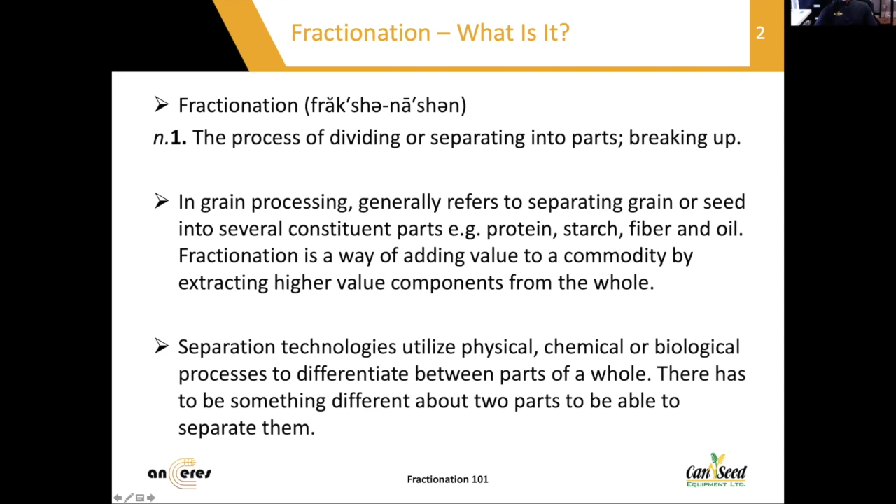And separation technologies utilize physical, chemical, or biological processes to differentiate between those parts. And so there has to be something different about two parts, obviously, in order to be able to separate them. So I wanted to start by talking just a little bit about what makes up seeds and how they're composed, so that we can understand then what's necessary to take them apart and get these components that we're interested in.

This slide just shows a number of different Western Canadian commodities that end up being processed through fractionation in one way or another. I think everybody today thinks of fractionation perhaps in terms of this protein extraction, but even things like wheat flour milling, for example, is a fractionation process to some extent. And canola oil crushing is a fractionation process where we're extracting the oil.

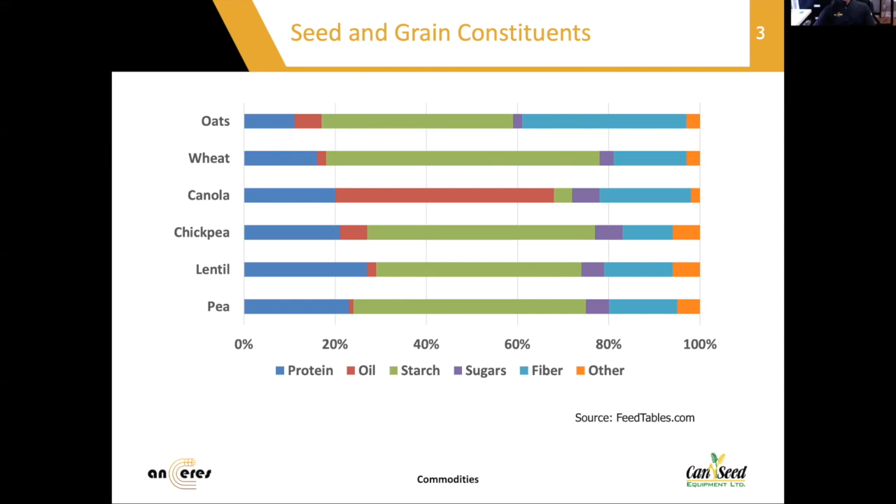So you can see that most of these commodities here, there's a lot of big green bar there. That's the starch component. And canola obviously doesn't have hardly any starch in it, but it has a lot of oil. So, as I mentioned, there's kind of four big pieces. There's also some sugars and other components in there, but we're primarily talking about these four big components.

So common fractionation technologies rely on differences in things like size, density, solubility and electrical charge, and digestibility, all these different characteristics of those components in order to separate them. And in general terms, there's two primary ways that we can think about fractionation: wet versus dry. And wet fractionation is involving usually aqueous, usually water-based separation.

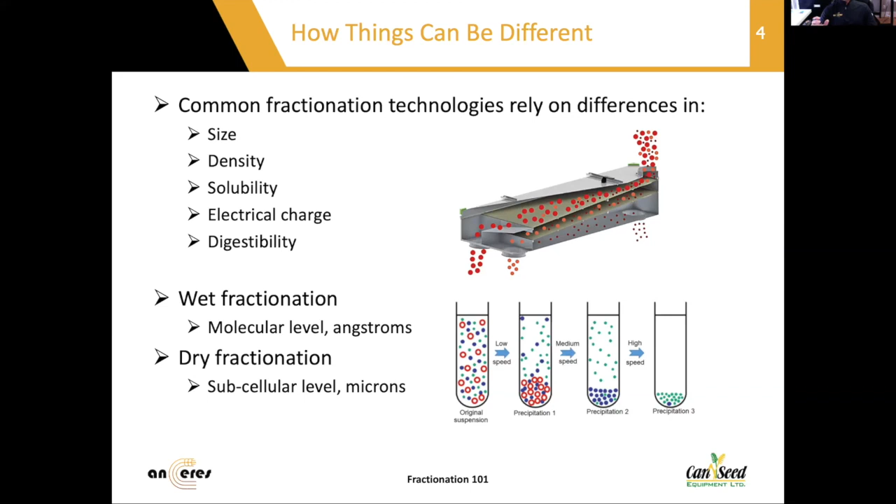And when we're doing that, we're making the separation down at the molecular level. So the size of that is called an angstrom, which is just a very, very tiny, like 1/10 billionth of a meter. Whereas dry fractionation is typically happening at a much larger scale. It's on the level of essentially the cellular level of the plant. So you're taking those individual cells and just breaking them up a little bit.

I want to talk for a minute about what those main components are that I mentioned on that previous slide, and some of the key characteristics that help us then use technologies to get them apart. So proteins, which you heard a lot about if you were on the webinar last week, are basically built from amino acids, and they're relatively large molecules. There's a whole bunch of amino acids that are strung together in a chain, and then that chain ends up getting folded and pleated, and you end up with this sort of clumpy protein particle.

It has a positive or negative charge, and will move in an electric field. So that is one way that we can sometimes separate them. And another characteristic of proteins is that they have what's referred to as an isoelectric point. So you can put proteins into a solvent like water, and at a certain point they will be soluble. And at a certain other pH level, they will not be soluble and they will precipitate out. And again, that's another technology that can be used then to separate them.

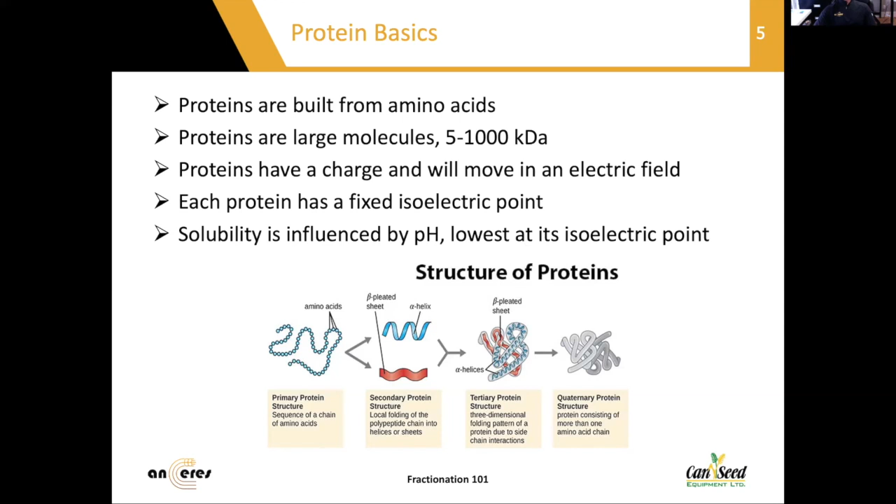Carbohydrates, which are made up of simple sugar molecules just stuck together in a different order, include sugars, starches, and fiber. They're big classes of carbohydrates. And all three of those were mentioned in that breakout slide for the different commodities. A couple of key differences among some of these are that starches generally can be dissolved in water, and cellulose, which is a fiber, does not. So we can start to separate these out again because of how soluble they are.

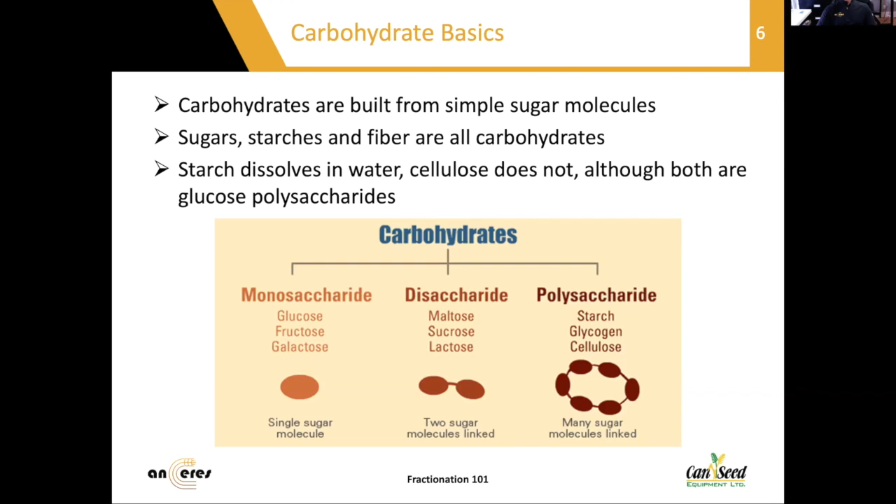And then fats are built from fatty acids. And on the left-hand side there, you can see what's referred to as a triglyceride, so 3 fatty acid molecules joined together. A couple of key characteristics there are that they are less dense than water, so they'll float. The photo on the right is something that you might see in your kitchen where you have, say, chicken stock, and if you let it sit, that fat will float to the top, and the solution below that has a lot of proteins in it, which as it cools off becomes like a gel. So it's temperature dependent, and it's also density dependent, allowing us to make separations there.

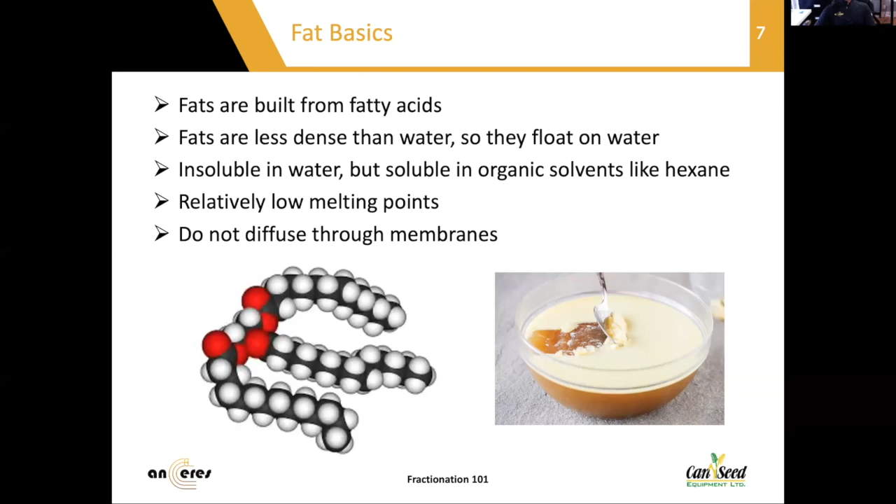Fats are soluble in organic solvents like hexane. So if you go to a canola crush plant, that's one of the methods that's used to separate the oil out of the canola from the meal, which is made up of protein and fiber mostly. They can put that oil into solution in the hexane and then remove that and then separate the hexane from the oil.

Okay, let's take a look at how seeds are basically composed. Whether they are oil seeds like canola or soy, or whether they are starchy seeds like wheat or barley or legumes, they generally have similar characteristics. There's a seed coat around the outside, which is mostly made up of carbohydrates, fiber. And then in the inside, there's a whole bunch of cells in there, which are storing energy molecules, starches, fats,

and proteins. And so when we're talking about dry fractionation, basically we're taking these seeds and we're breaking them up to the point that we can start to differentiate these starch and oil and protein particles from one another in still their relatively large clumps, if you want to call them that. Whereas in the wet fractionation, we're breaking this all the way down to the molecules.

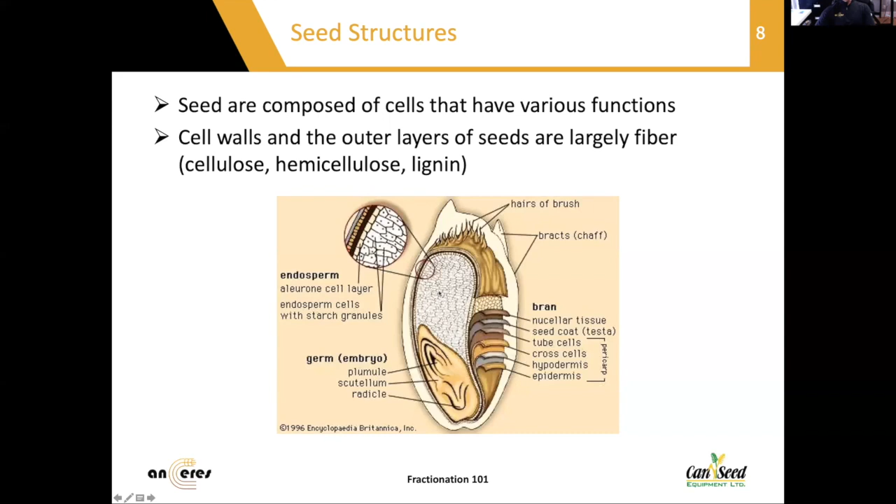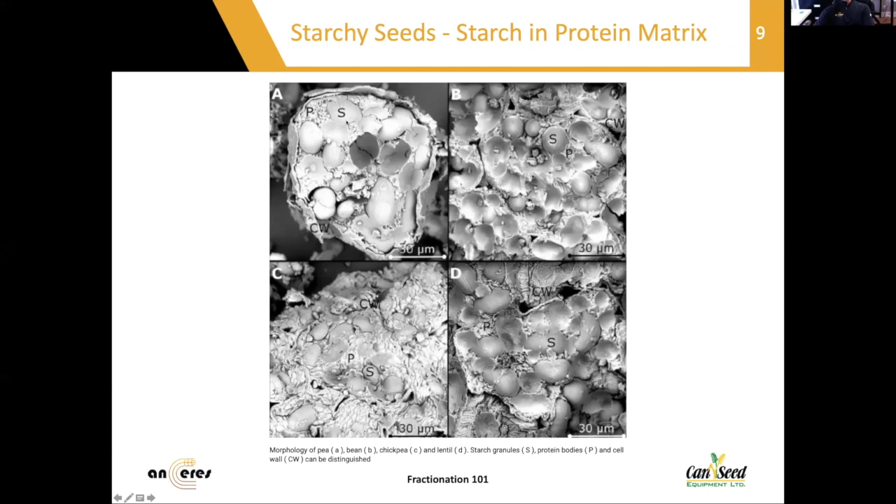If we look at an oil seed, it's very similar. It's got this cell wall around the outside, which is again made of fiber. And then inside we have protein bodies and oil bodies, and they're very similar in size in the oil seeds, again, sort of in this 2 micron range.

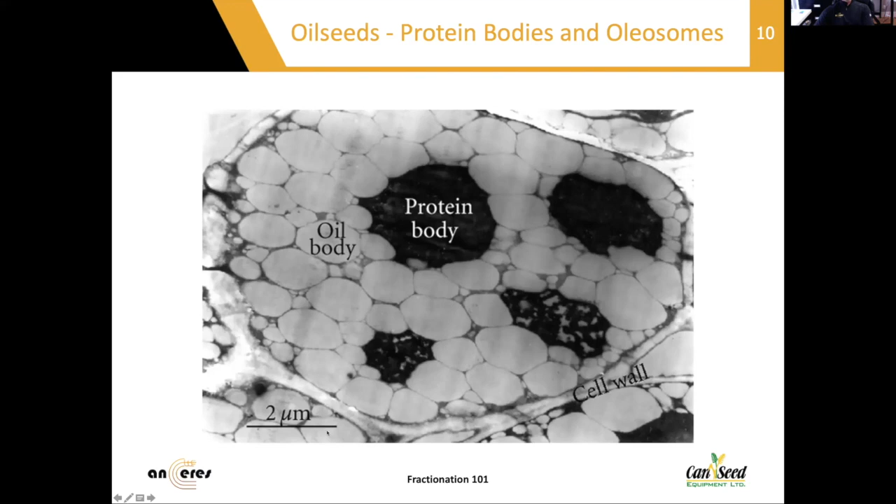So I've mentioned that we have wet fractionation and dry fractionation. Here's a high-level process flow, and if you have starch-rich legumes, so lentils and peas and things like that that don't have any oil in them, generally in a wet process, we would go through the left-hand side here. We grind it down, put it into water, and then we use hydrocyclones, and I'll show you a photo of those. Basically, we're separating there with very high rotational speed. We create a lot of centrifugal force and just take the larger particles out from the smaller particles.

And then on the basis of some of those things I had mentioned about proteins, that we can put them into solution depending on the pH, we can go through that process of solubilizing them and then precipitating them, and then ultimately we dry them to get the protein isolate that we're interested in. On the oil-rich legumes, you have to take the oil out first because the oil interferes with a lot of the rest of that separation process, but then the last part of it is similar.

And as I mentioned, on the dry fractionation, we're basically taking and milling it down, and then a common approach is to use air classification, which allows us to separate those starch granules from the protein bodies on the basis of how large they are.

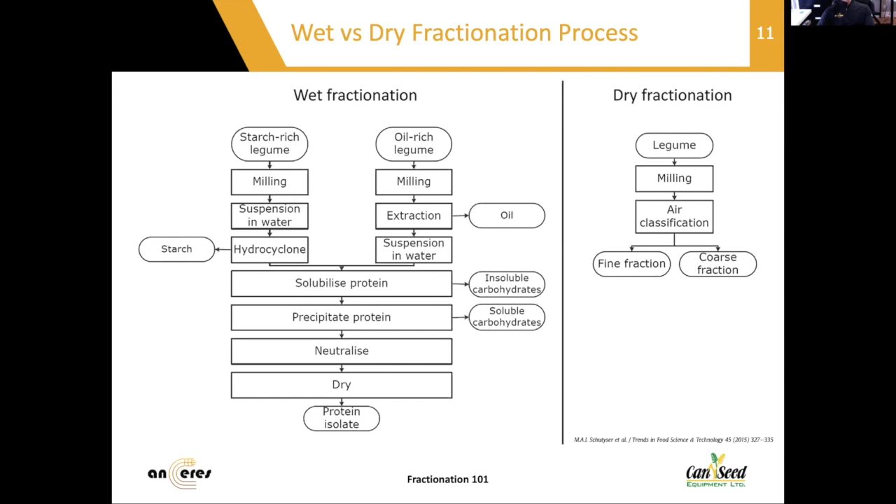So some of the key aspects that are different between wet fractionation and dry: I mentioned that the particle size we're talking about is sort of at the molecular level in wet fractionation and at that micron level close to the cell size for dry. With regard to the purity of the fractions, by doing the wet fractionation, you can produce what are referred to as isolates, so very high concentration, like 85% or more pure protein. In the dry fractionation, you only are able to concentrate it up to about order of magnitude 50% protein.

We obviously use a lot more water in wet fractionation, and we use a lot more energy because we then have to dry it down once the extraction is completed.

There's also a fair bit of chemical use. It's common, not always, but it's common in wet fractionation because we're trying to manage that pH by adding acids or bases. Some protein extraction also requires high salt content, so there may be a lot of chemicals that are added in the wet fractionation process, and that doesn't happen in the dry.

You maybe are familiar with protein denaturation. If you're gonna cook an egg, you break the egg and put it onto a hot surface, and the white of the egg solidifies, and you can see that it changes, right? So what's happening there is those proteins are being changed by the heat.

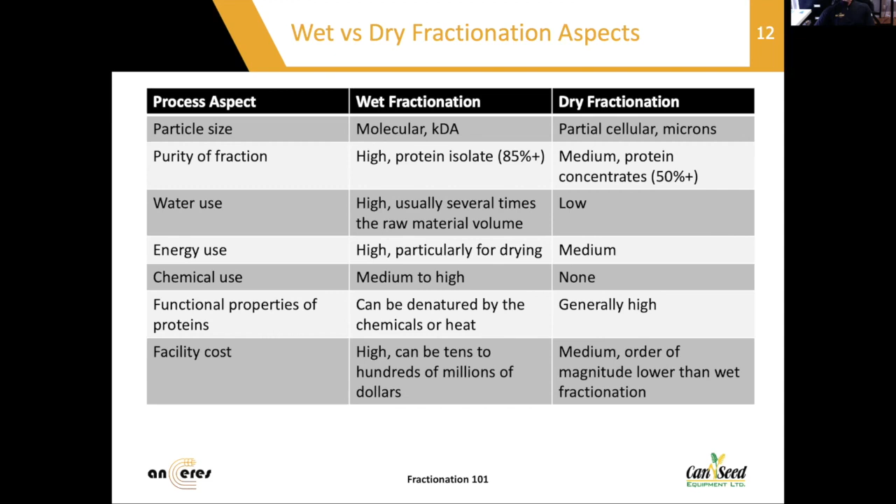Okay, and then just before I turn this over to Chance to talk about some of the dry fractionation technologies, I'll just show you a few examples of the equipment and technologies that would apply on the wet side. In the front end of the plant, so preparing the material before it goes into fractionation, that process is very similar between wet and dry. Chance will talk about those.

And then we kind of start on the wet side with grinding and slurry dispersion. So you've got equipment such as this blue grinder here. We have things like centrifugal sieves up on the top right here, where you're pumping a slurry in there. And because those fibers don't break up very easily, they stay larger, and the proteins and starches will go through the sieve and the fiber can be removed. So that's one way of separating things.

Decanter centrifuges and disc stack centrifuges are somewhat similar technologies where they're using very high rotational speeds in order to separate slurries and get dry matter out of wet, or to separate high and low density slurries. You've probably heard of things like ultrafiltration. That's the use of membranes.

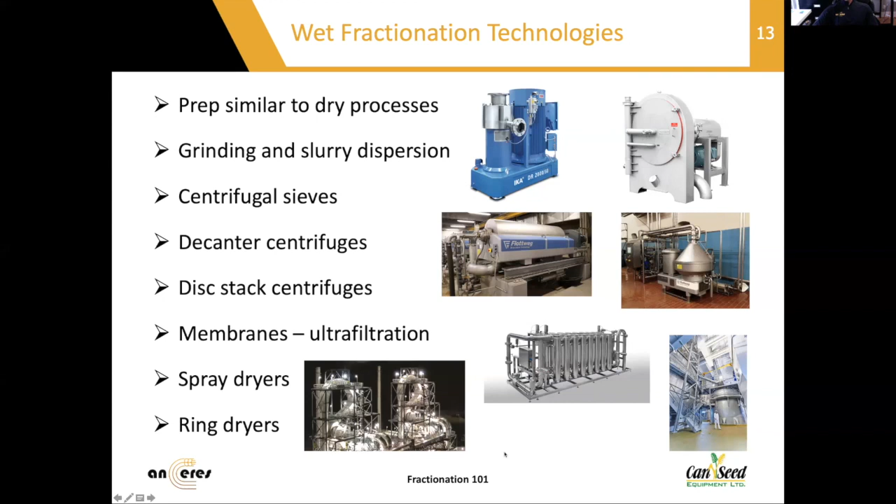There's obviously small scale equivalents that are used in pilot plants and lower capacity facilities. But a lot of the large scale facilities, like that Roquette facility under construction in Manitoba right now, the scale of these dryers is quite enormous and obviously very expensive. So Chance, I'll turn this over to you now, and you can go ahead and talk about the dry side.

Everyone hear me? Yeah. Yep. Here. Yes, we can hear you.

Okay, thank you, Trevor. So I will go through a really brief, broad overview of some of the equipment necessary on the dry fractionation side. Something I want to cover off on really quickly is the potential need on the front end for pre-cleaning. This is a relatively more basic part of the operation, but an important one. I'll talk about it at the end of the presentation a little bit. It may be worthwhile for an owner to use a third-party resource for this. However, I do want to touch on it really briefly.

So your raw material coming in, if you do have needs for pre-cleaning, you want to use some type of rough cleaning, whether that be a drum cleaner or air aspiration. Your primary purposes here are to reduce your chaff in the material. And your secondary purpose is to remove foreign seed from your primary seed that you're trying to put through your process. Other than that, there's not much else to it. So we'll move on to the next one.

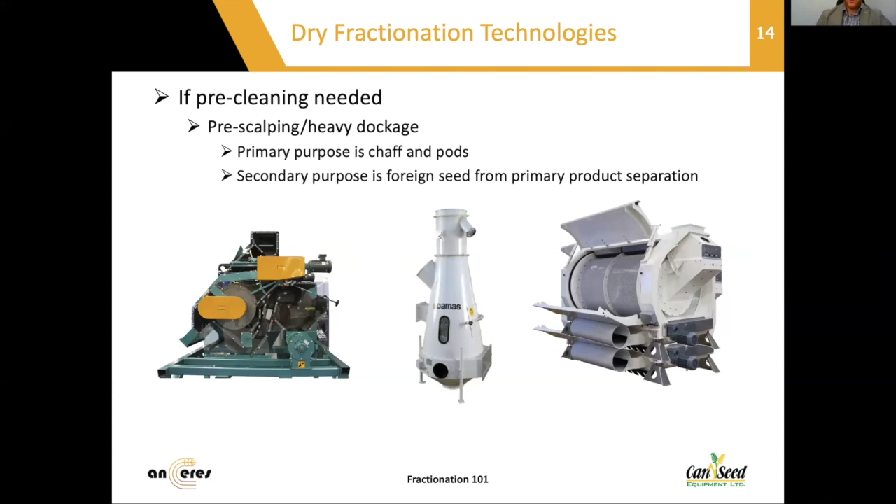Further pre-cleaning here: air screen machines, rotary drum sieves, depending on the application. This is typically more used in fine cleaning and grading. Your primary purpose here is to do a closer separation of like from similar.

And what I mean by like from similar is anyone who is a front-end agricultural producer knows you always get some type of cross-contamination of your fields, even if you're a pedigreed seed grower. So this could be cereals in your peas, or vice versa, or foreign cereals in your cereals, or foreign pulses in your pulses. So what you're trying to do here is just reduce your foreign material.

So let's say we're processing field peas in our dry fractionation process, and we have some wild oats and/or barley that's 0.05 or 0.5%. To mechanical machinery, those products can look really similar. To our naked eye as a human, they look very different. And that's what I mean by like from similar. Size and length of a pea compared to an oat can actually be quite similar, but it's a very different product. Your secondary purpose here with your fine cleaning and grading is to separate like from like.

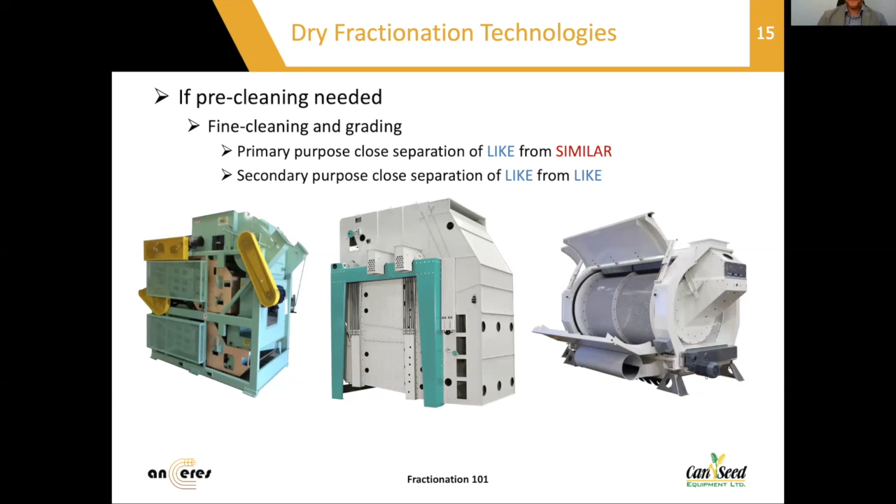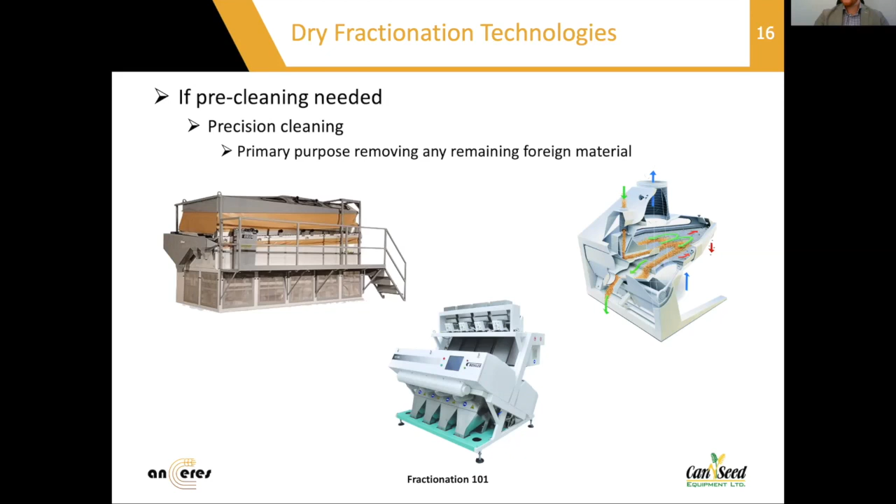Final step of your pre-cleaning: more specialized equipment like your gravity tables, your destoners, your color sorters, and your primary purpose here is removing any remaining foreign material. So going into the fractionation process, you have some more expensive equipment that I'll talk about in a minute. You don't want any stones, you don't want any foreign material going into it. Number one, from a purity perspective, but also number two, from an equipment integrity perspective. That can be very damaging on your process, and downtime in your process can be very costly as well.

So that's it for the early part of the pre-cleaning side of it. What I'm going to go into right now is your basic dry fractionation process. This is a process flow from a client that we're working with currently. They are pursuing a multi-product strategy. So this is not only a dry fractionation process. This is a dry fractionation as a subcomponent process, but moving into a wet process.

So what I'm going to talk about a little bit is the front end of the process, which is on the left-hand side, which is your dehulling and your hull removal. And then the middle part of the process is a little bit unique to this one client. So I'm going to touch on it very briefly, and then I'll move into the more standardized approach of a dry fractionation.

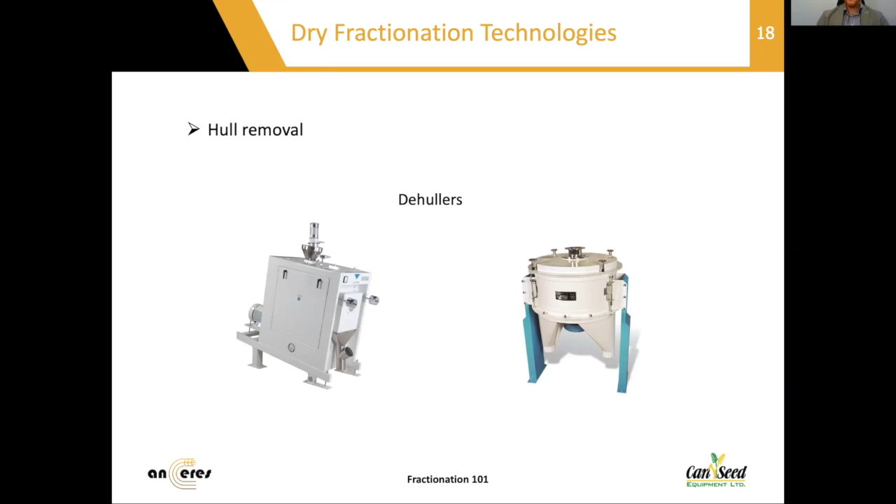So your first step in your fractionation process is your dehulling. Relatively inexpensive, simple technologies. However, the proper technology should be used here. The more appropriate technology would be the one on the left, which would be an emery stone mill type application. There are some people using impact mills, which would be the one on the right. And your primary purpose here is to remove that outer cell wall to give access to the seed and basically just make your fractionation process a little bit more efficient. Relatively inexpensive again, simple to integrate into your process.

After you've removed that hull, you have good product, you have cracks and brokens, and you have hulls. You need to separate these two products. So your two separation technologies that are easiest to use would be a cascading or multi-pass style aspirator, which is what you see on the left. Or in certain cases, depending on plant layout, you could go to more of a combined model, which is on the right, which is a vibrating screen deck conveyor. This has the benefit of conveying material, but also screening off some of your lighter hulls. The more standard approach would definitely be the one on the left.

Again, relatively inexpensive, but depending on the tonnage that you're trying to put through your mill and or your layout, each of them have their own applications. On a per unit cost, definitely the right-hand vibrating conveyor is much more expensive than the two options on the left. So what we see most often would be that cascade or multi-pass aspirator that you see there.

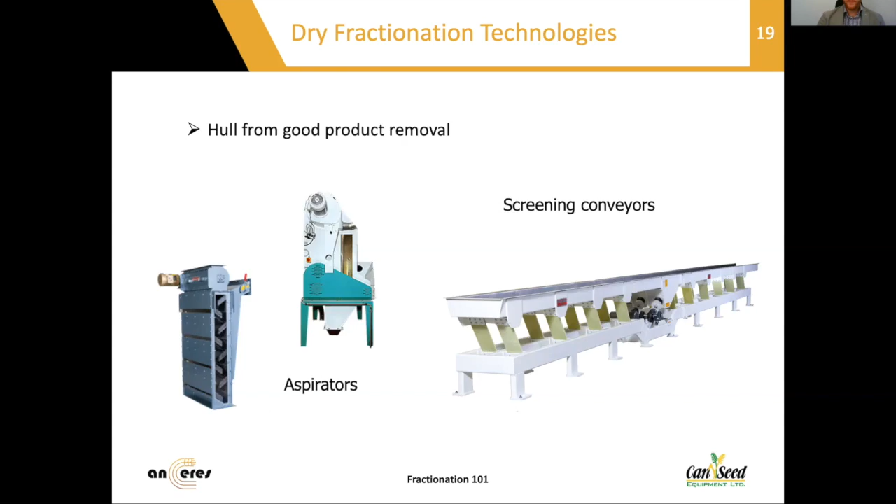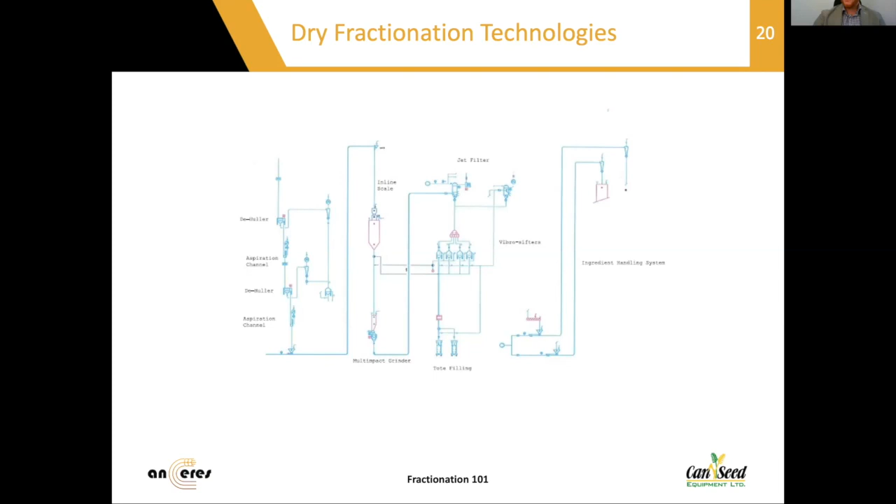So that's the front end of the process there, which you see again on that left side of the process flow. What we're going to do now is move into the actual fractionation side of the process, which is the middle portion that you see in the middle of the screen with your scaling, your grinding, and your fractionation.

So the first part of this process is not 100% necessary for output, but as Trevor spoke about earlier in terms of the level of investment that you're making, whether it be for dry or wet fractionation, we're talking many, many tens of millions of dollars for any significant tonnage. At that level of production and level of capital cost input, you're really, really trying to manage on fractions of percentage points what your input and output are.

One of the ways that you can do that is inline scaling, either coming into process, in process, or after process. Again, this is not 100% necessary, but relative to the cost of an entire project, this is really a management tool that makes it easier for you to measure that shrink that you're incurring in your process, and just allows you to eke out those little small gains that you want over time that are incremental and really necessary to drive margin in your business. All right.

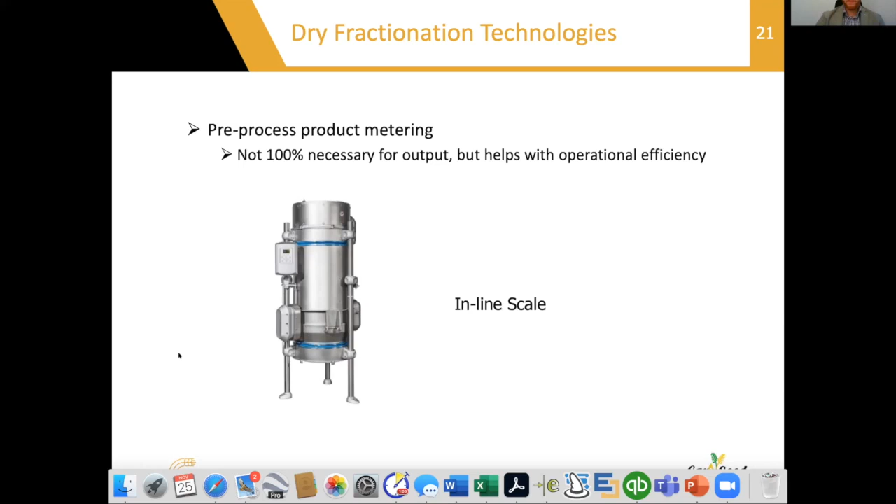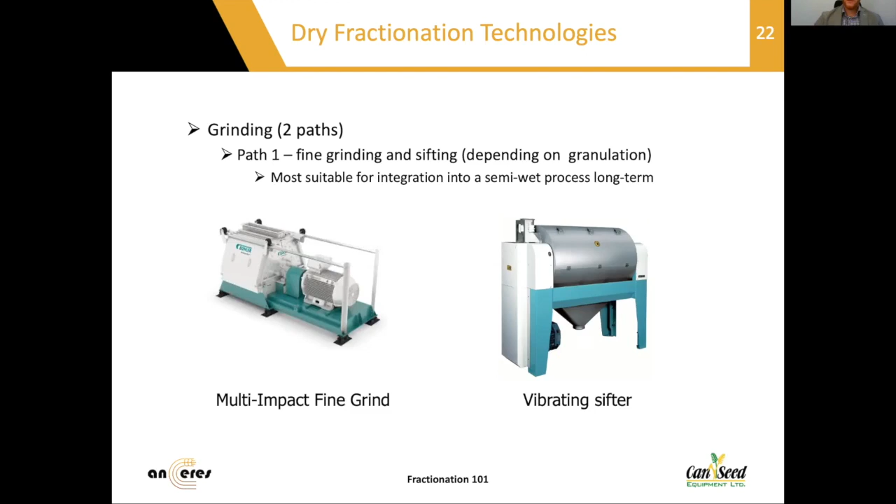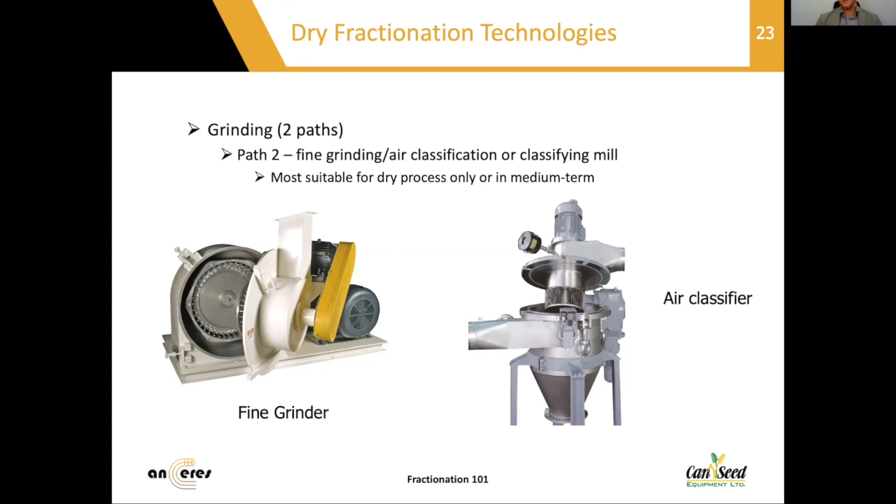And that's how you're sorting your classes of products into their different classes, your protein, your starch. And finally, we've talked about these mills, we've talked about air classifiers, we've talked about aspirators, we've talked about pre-cleaners. The common concept between all of these is they require air.

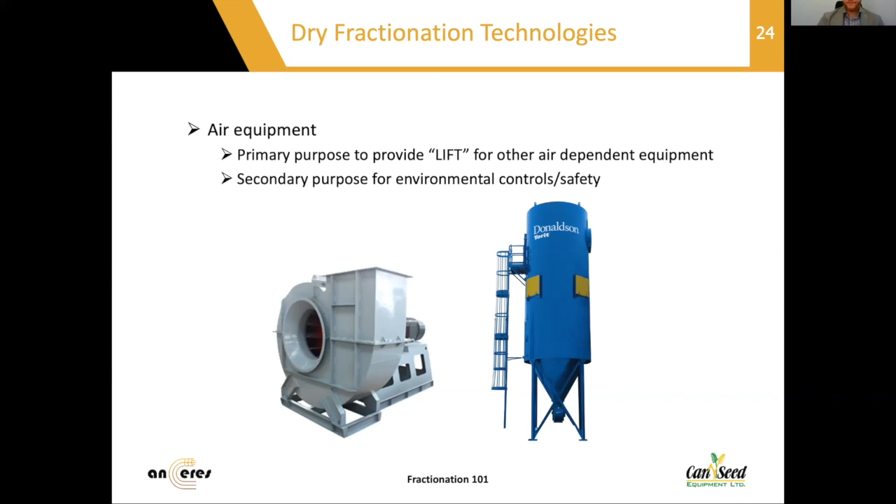And last but not least, I want to just have a really brief overview. I touched on it at the beginning. There are strategies that you can take to break up this process in order to reduce capital, reduce the amount of real estate that you need to produce a mill, whether it is dry or wet fractionation, or just focus on your process that you're good at and have someone else that you partner with that helps you with another part of it.

So you have to ask yourself, are you going to handle the entire process, or will you partner with third-party organizations? In our experience, it's more than likely that if you do partner with a third-party organization, it will be for that preconditioning stage. There's a number of third-party cleaners that are willing to do this type of work in the marketplace, and it's a relatively inexpensive endeavor.

Your one exception of that in a more advanced stage would be a co-packing agreement. So you would create the primary product, which would be a dry fractionated product, possibly put it in mini bulk bags or bulk truck it to a third-party location, and then have them put that into a different size bagging type operation. This is typically a shorter term strategy. And based on the amount of money that you're spending, this is typically something in the short, medium term that's very rapidly brought in-house.